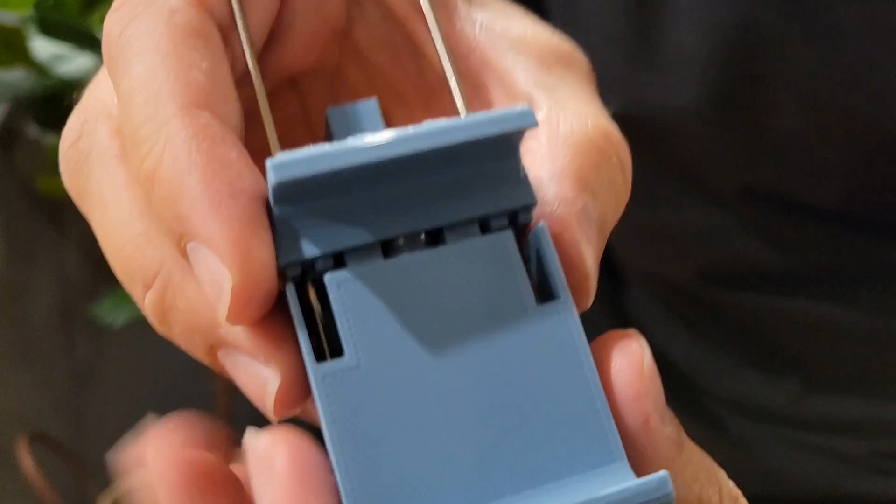All right, what you're looking at is not quite the finished version, but it's the version of a phone holder that I designed that you can stretch and move this top portion over to clamp your phone. So I'll take this old phone out and you can see I've got the spring installed in here. I'll take that off - if I move this up and down, then it will pull this back with some force to hold the phone in. And these pieces all come out because I haven't fastened it together yet, and I did that just so you guys could see.

And eventually I'll cut these bars as well. But this part - we'll get into the design of this - was designed to interface with the 3D scanner so that it can hold the phone while looking at the object in the ring, because we talked about building it with a ring design. It's pretty neat, it's a pretty neat design right here.

I like the springiness, I like how it moves. The 3D printed part has a lot of friction, so it doesn't open super easily sometimes, but with some sandpaper and maybe a bit of finishing work on the print, I'm sure I could get this to open a lot better.

I'll talk about the methodology, mechanically, that I was thinking about in Fusion. I plan to break this whole build up into 3 parts for the mechanical section. This phone holder has some more complex geometry, so I want to start slow so you guys see the whole design process.

As we break into more parts after I finish this phone holder design, I'll show you the 3D model of the scanner and how I built that. I might not take as much time there, since by then we'll be more onboard with inherent CAD design. The last part will show what it's like to print these pieces, assemble it, and how the build actually works, before we move on to the mechatronics and software side of this project.

So let's go design this thing.

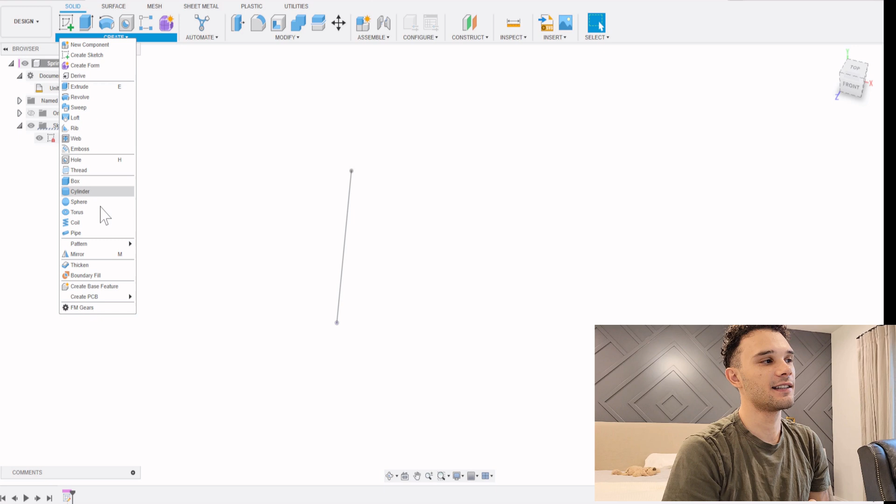So we're calling this the spring, it has an 8 millimeter OD, so we'll call it that. And it's 37 millimeters. It's not perfect, but close enough is good, because the spring needs to be under compression a little bit.

We'll create the base of the spring with the circle representing the outside, and we're going to use the coil tool, if you're familiar with that. I found there were, I think, 13 revolutions on the coil. Double check that, it's 11.

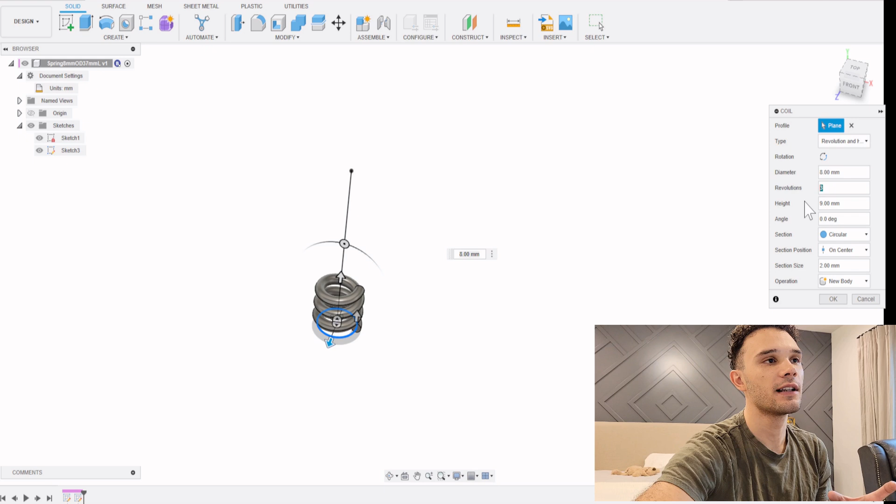We're going to play with these things. It doesn't matter if the spring is perfect, it just needs to be a good model to help us reference. You wouldn't want to 3D print this spring, you'd want to find a spring of your own. I might leave a link in the description to a spring that's similar that I can find, or if you have anything else laying around the house, design it to your own needs.

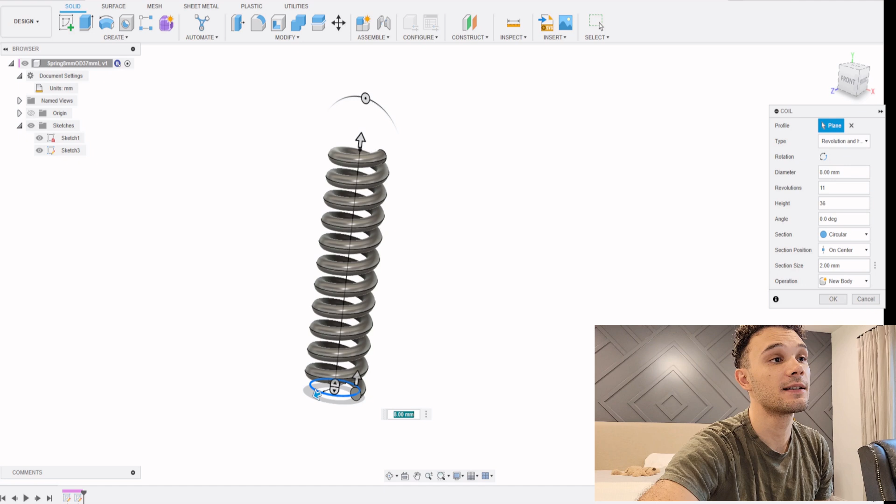The section size of the spring, the diameter of the spring wire itself, is about half a millimeter. And there you go, we got a pretty good looking spring. If you've ever used those tools, you can play that back.

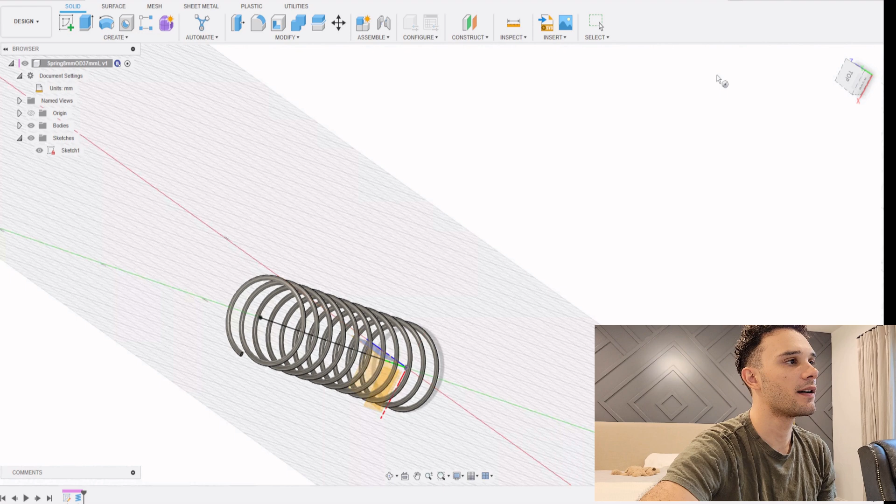Looking around the spring, there's a portion at the top and bottom that are a little bit shorter, where they kind of taper off. So most of the spring has a uniform distance between each coil, but at the top you have 1 or 2 coils that are shorter.

So we'll look at the face of the spring and create another coil. The coil tool is kind of weird, you can't just build it on a sketch, you have to build it on a plane and then move the coil you make to that plane.

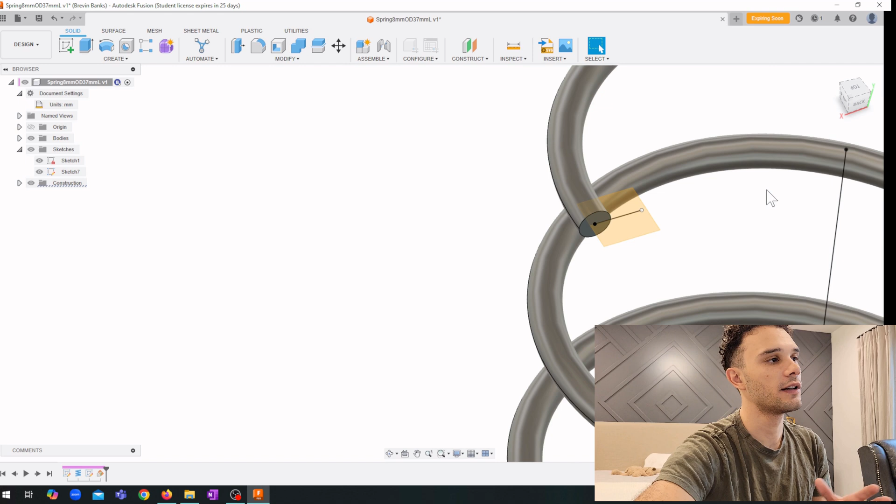So we're building a plane on the sketch where we want this coil to be. We'll use the same diameter we used, and give it about 1 revolution, maybe a little more, to create that offset tapered portion of the spring here.

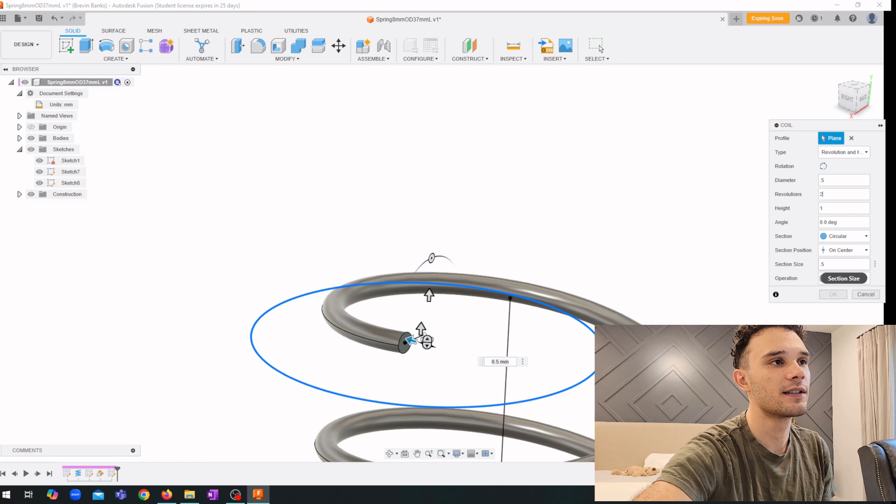I'm getting a couple errors because it says the radii are too small. It'll work when I get these parameters played with a little bit. So yeah, there's 1 revolution. Now we'll move this guy so he's in line with the previous coil there.

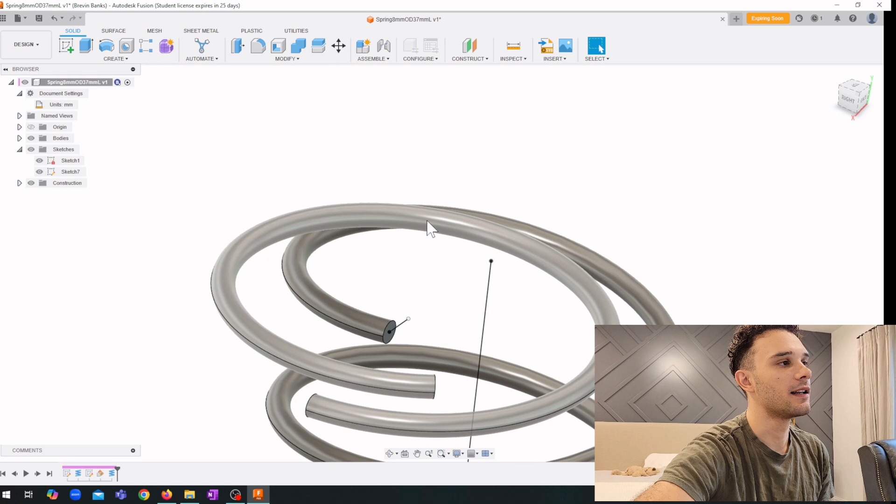We'll have to edit the feature a little bit, make it a little shorter, it's a little too tall. Then we'll move this coil onto the other coil like that, and we'll do the same on the bottom, so we can speed through that part.

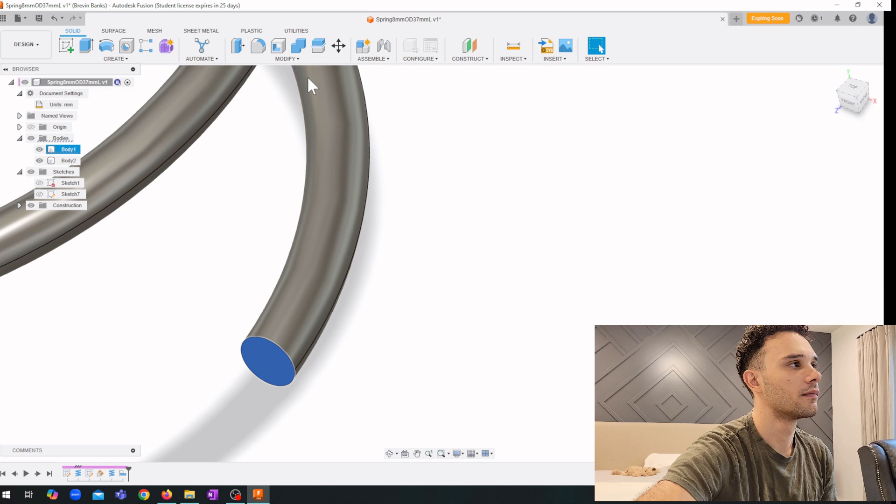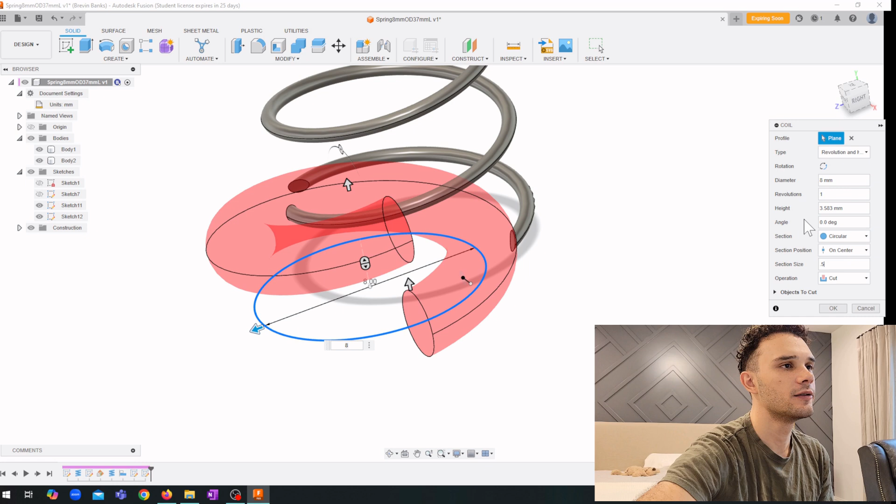Creating a sketch and the plane for the sketch, then grabbing the coil tool again to create the circle for it. It's going the opposite direction it ought to be, so we'll reverse that. Then I'll set the section size to half a millimeter and make it a little over 1 revolution.

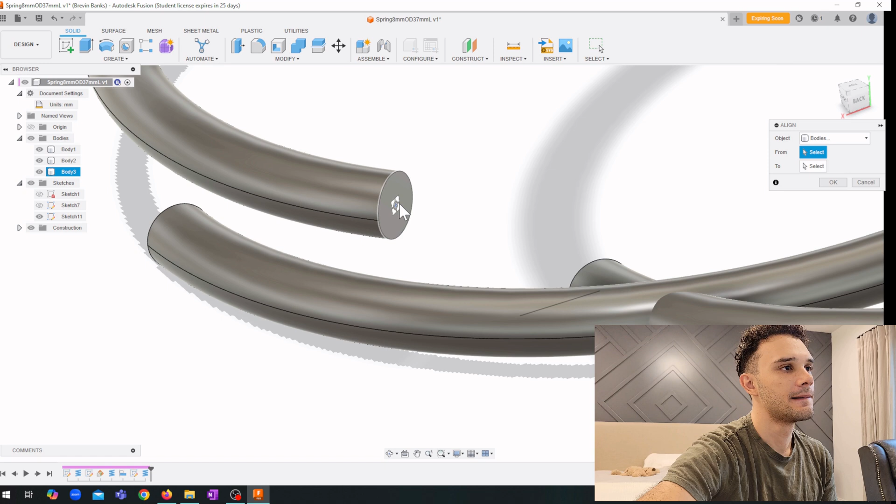This is my method for making springs. If you really want a really tight, robust spring, there are better methods than doing this - you might create your own sweep with your own path. I prefer the coil tool because it's simple.

It removes a lot of the overhead. Now we'll combine the bodies to make them one. So we selected the 3 bodies and used the combine tool, and now they're all 1 body.

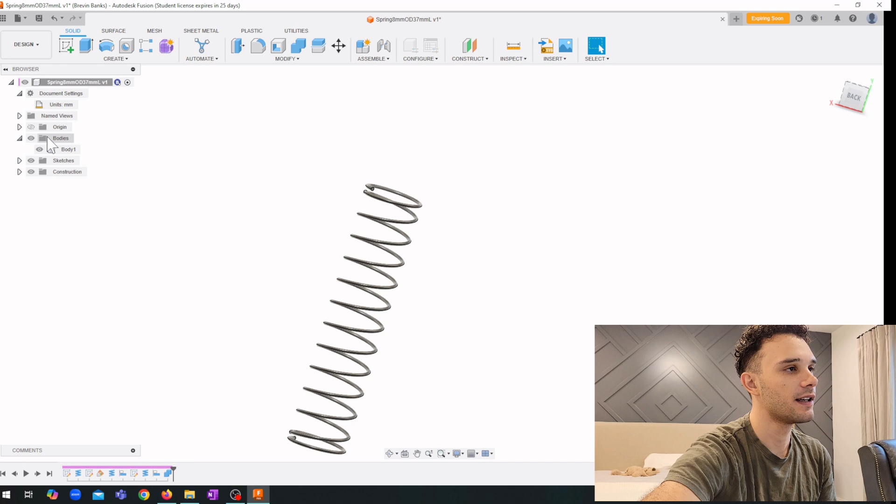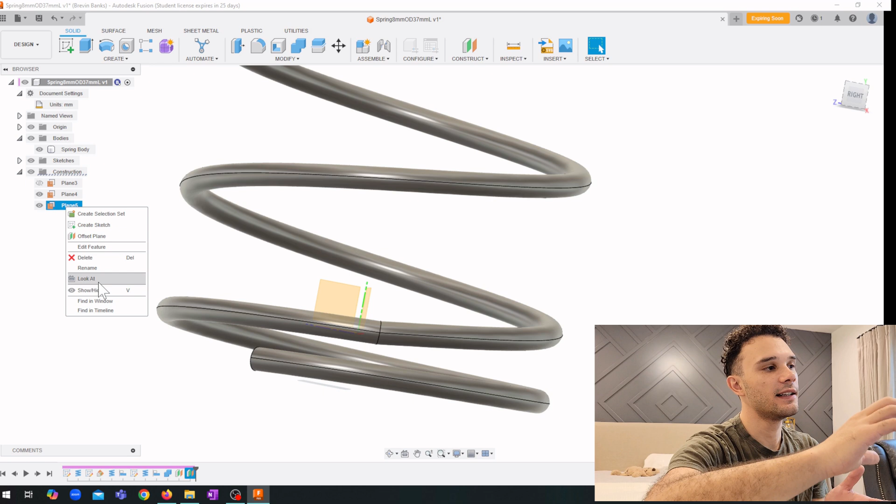I'm creating a few planes to use for adjusting when we create joints and make things fit together. So I'm creating a plane at the top of the spring and at the bottom of the spring. It's okay if it's not perfect, just somewhere near the ends. This is so we can place the spring easily and align it, because you use planes when you align and make joints. It's hard to do a normal plane to a round surface that tapers as it goes up or down, so that's why we have these planes.

So yeah, there we have the spring. I think it looks pretty good - pretty close to what it is like in my real life model.

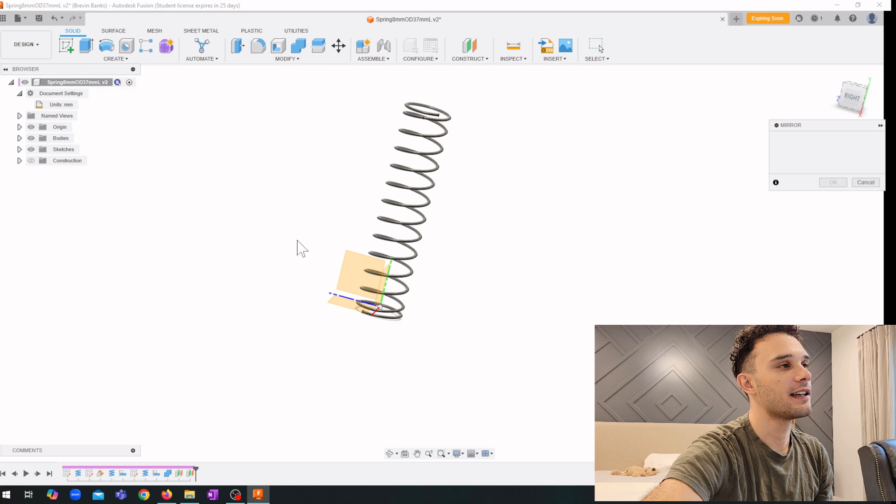And I just realized that it's backwards from mine. The one I just designed goes counterclockwise, and the one that I have turns clockwise. So we'll just mirror the part real quick, and we can hide or delete the other body. We'll use the one that turns clockwise.

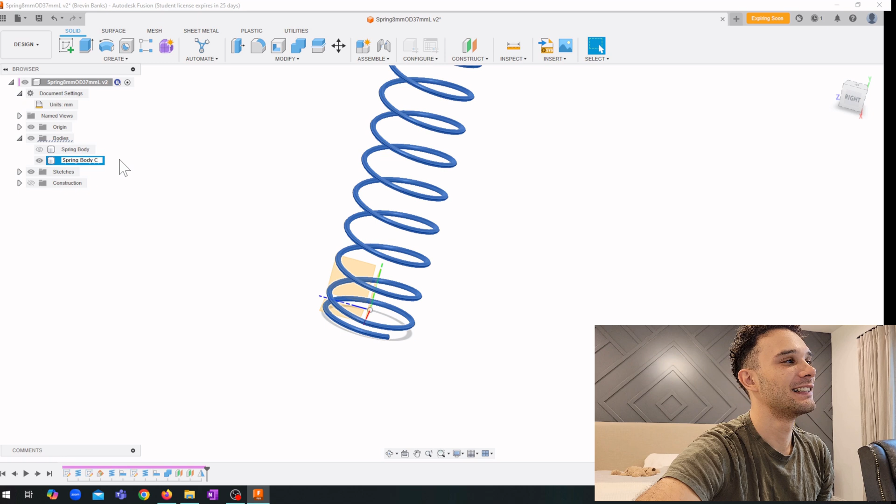There we go. There we have it - pretty nice looking spring.

Now let's jump over and create a new part for the body of the phone holder.

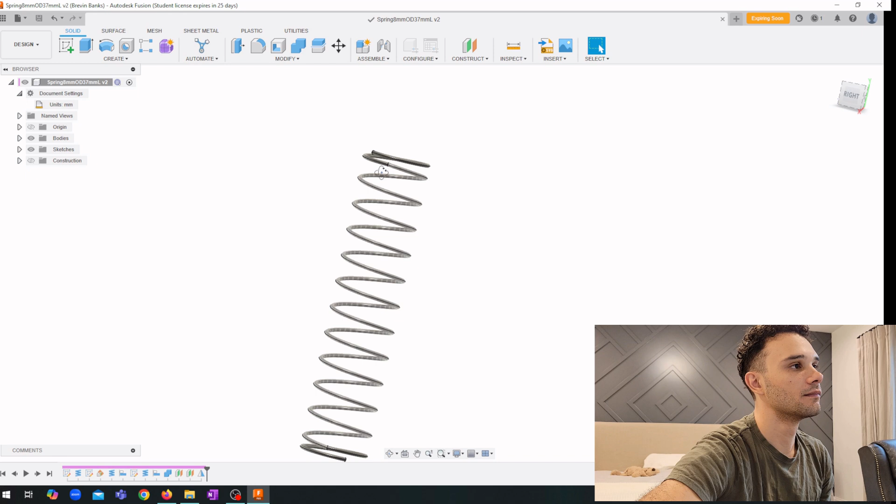Okay, so we got our new design - name it real quick, phone holder. We are going to insert what we just designed into this model. It's kind of like a master modeling mode where you take parts and build them with other parts in the same kind of assembly.

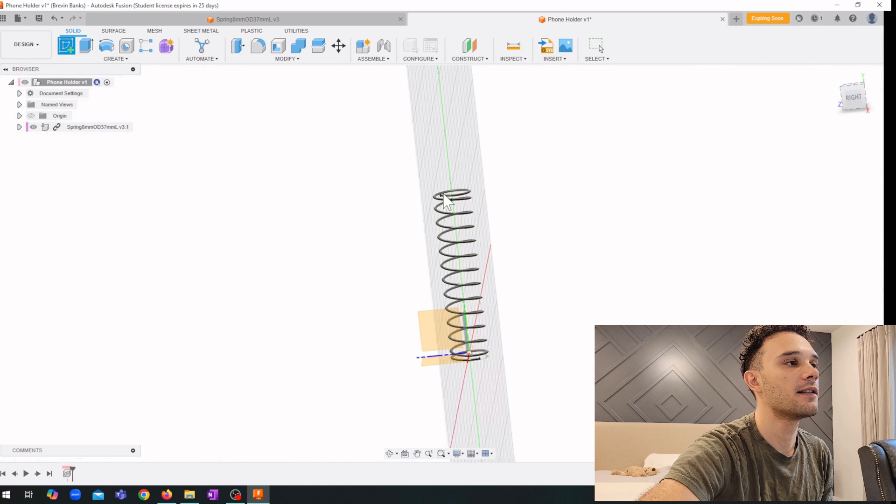So we imported the spring here, and this is where those planes will be helpful that we had on the spring, so we'll know how to reference what the true top and bottom are for where we want the spring to be contacted. We'll look at the construction planes we had for the spring.

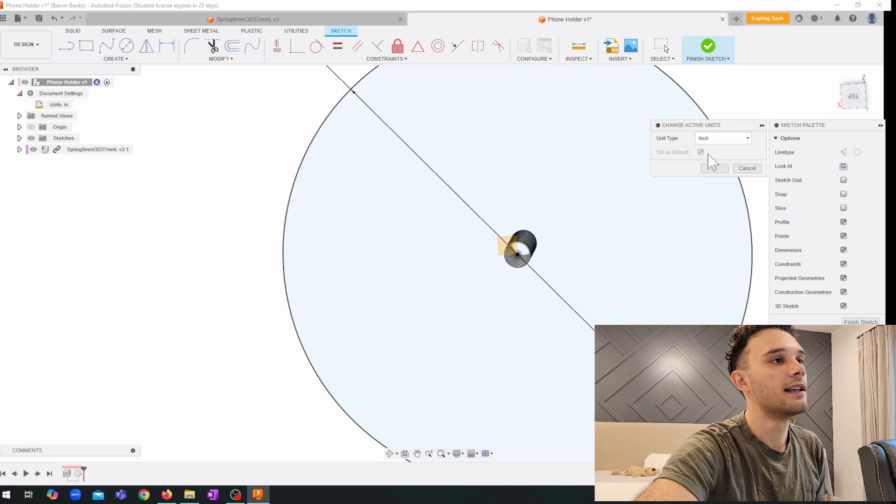We'll do the first at the top here. What we're going to be doing is creating these little inserts that go into the spring, into the inner diameter of the spring, and we'll keep the spring centered on top of it. So we're going to create a circle that kind of goes within this that has some tolerance, about maybe 1 millimeter total for the OD, and then the ID of the spring will be able to move along that.

But probably fit kind of snug with the 3D printer tolerance of this piece we're making. We'll pull this through a few millimeters - 3 millimeters sounds good. We only need like an inch or so of play, maybe 2.5 centimeters of play.

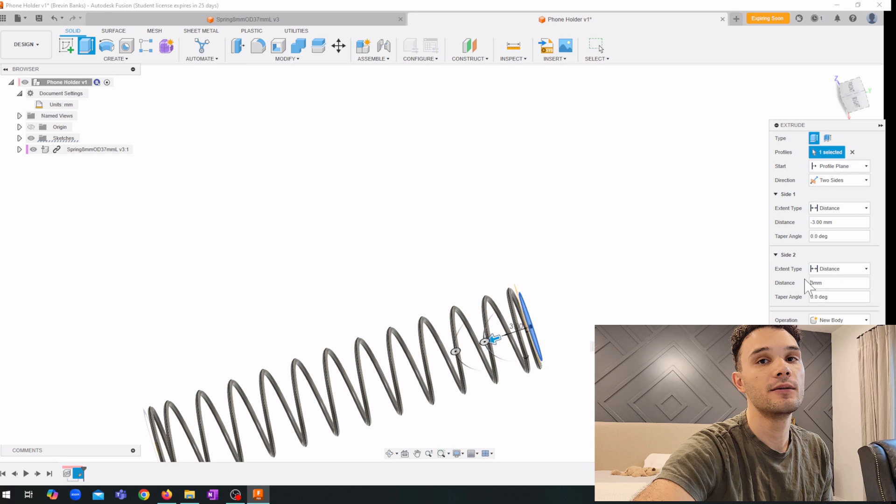And we'll pull this the other way as well, so that there's something for us to build on for the base part that this will attach to. This will make sense as we keep going.

So the spring will kind of wrap around this - you'll loop it through some of the coils so that it will rigidly hold on to that piece there. And we'll just mirror what we did above for the bottom, so we'll have those two bodies right there.

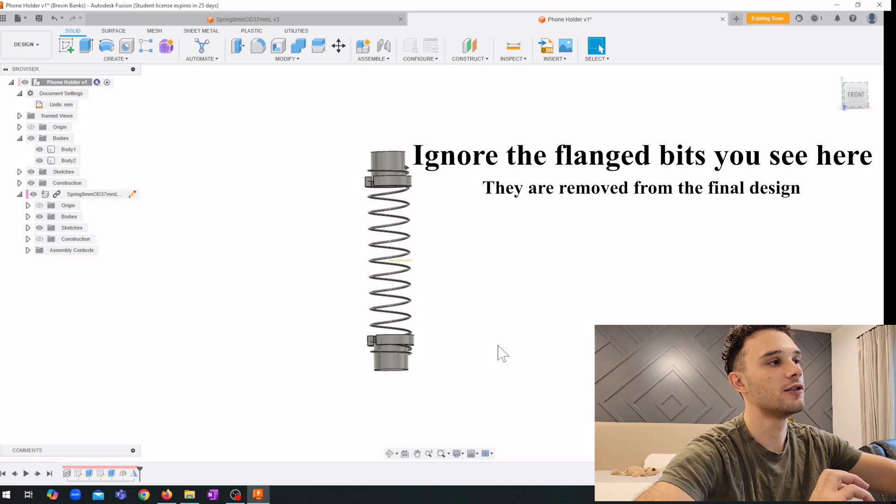Next, we're going to work on the body of the clip so we know where these things should align. I've measured the one I had currently to be about 38 millimeters wide, and I'm going to center this spring in the middle, making it symmetric about that construction line I put on the origin.

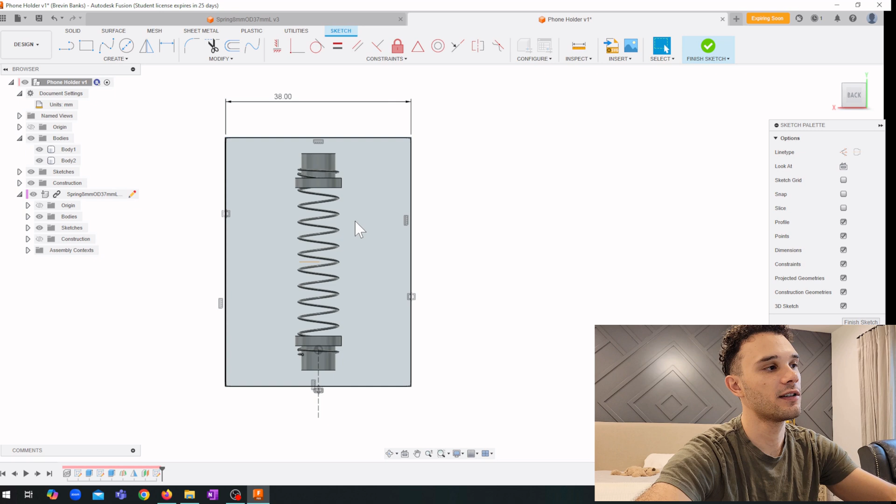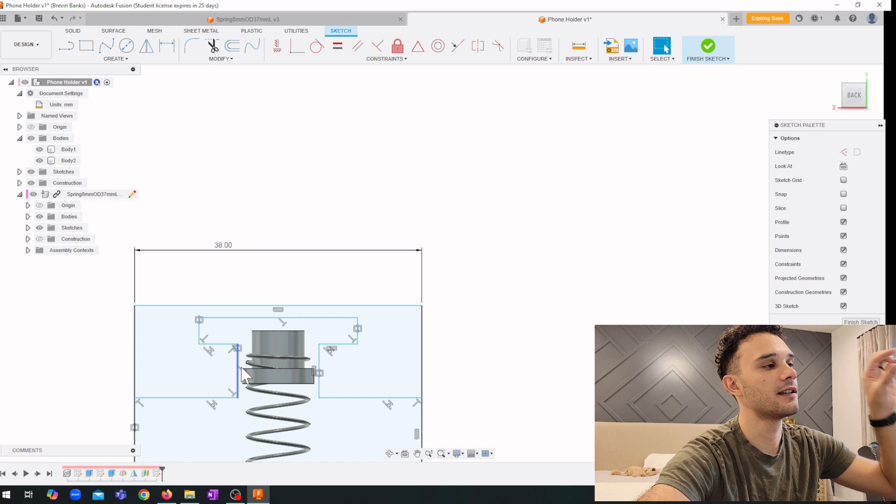Then we'll create some geometry to key these ends I've made for the spring holder attachment, so I put down some lines and use some constraints to make these things collinear. You can see that there. A lot of symmetry constraints because I just want this rectangular bit that's going to slide in and out from the front face.

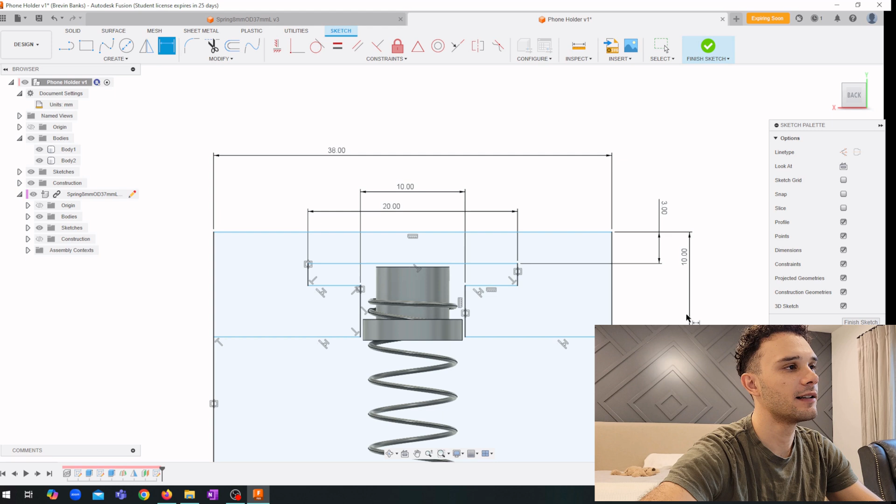I don't know, I'm really just eyeballing this. I know you can make features about 1 or 2 millimeters on the 3D printer, so we'll give that a 3 millimeter height right there, make this about 20 millimeters wide, then a centimeter wide right there, and another centimeter wide right there. Yeah, looks pretty good to me. There'll be some tolerance to play around with.

We'll just make things a little bit better here, giving a gap right there for this rectangular portion. Oh, and the height of the whole thing was, I think, also 50 millimeters.

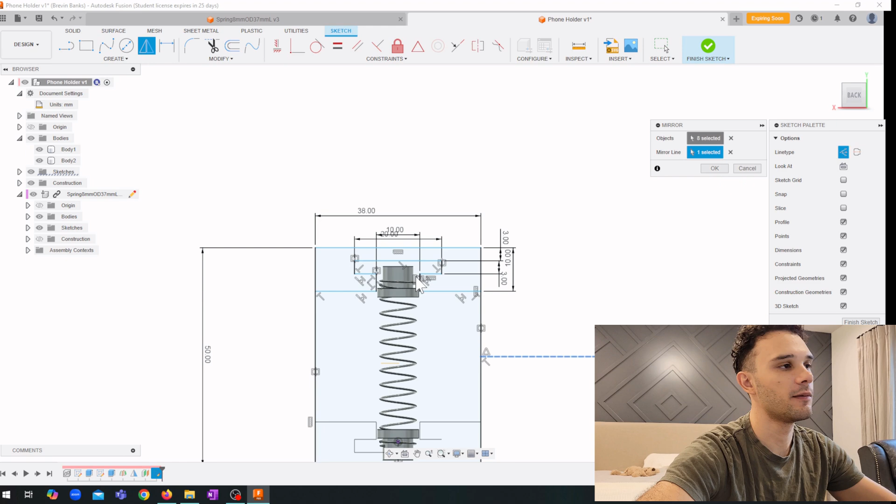We'll make this symmetric about the middle of the spring as well, and mirror that down so we can have both those features on the top and bottom. Now this will create the core feature of our phone holder right there.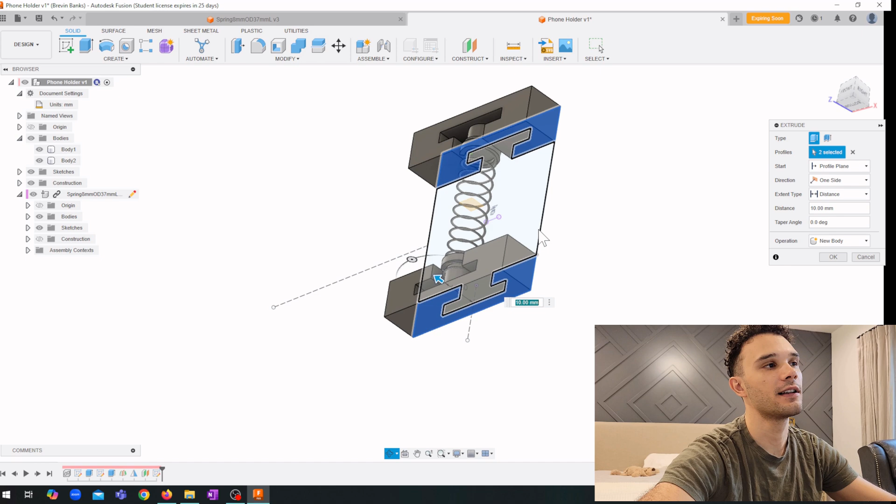So next step would be to make sure this is aligned in the middle of the spring. Then we'll pull these faces and create the first instances of the body of the clip, the phone holder. There we go. So we're looking like we've got something there now.

We'll pull the other side down and give that 2.5 millimeters, so it's up a centimeter basically, with 2.5 millimeters on the base right there.

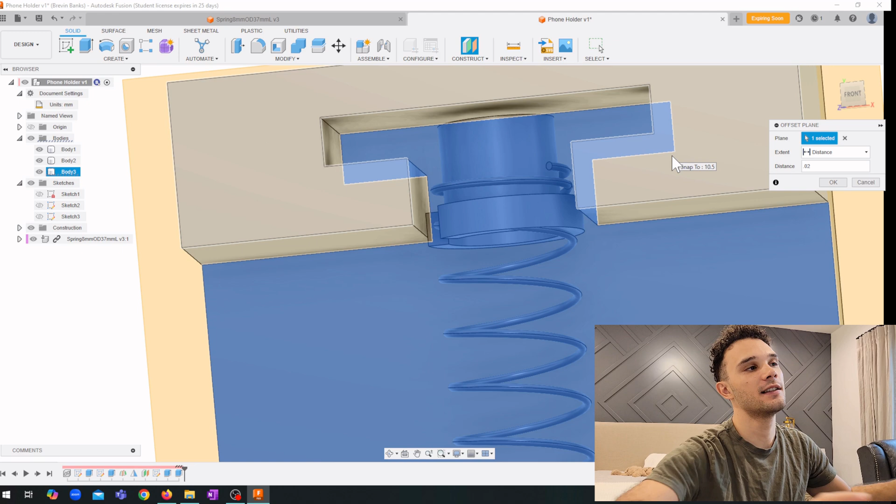Now we're going to create another sketch that's going to inlay into this clip we've made, for this rectangular portion that these circular bits will connect to. We'll offset about 0.5 millimeters, found that kind of works on the 3D printer. Then we'll pull these rectangles up and combine them with those circular portions we made that go through the spring, matching in line a little under the line of the face by maybe 0.2 millimeters of the top of the clip.

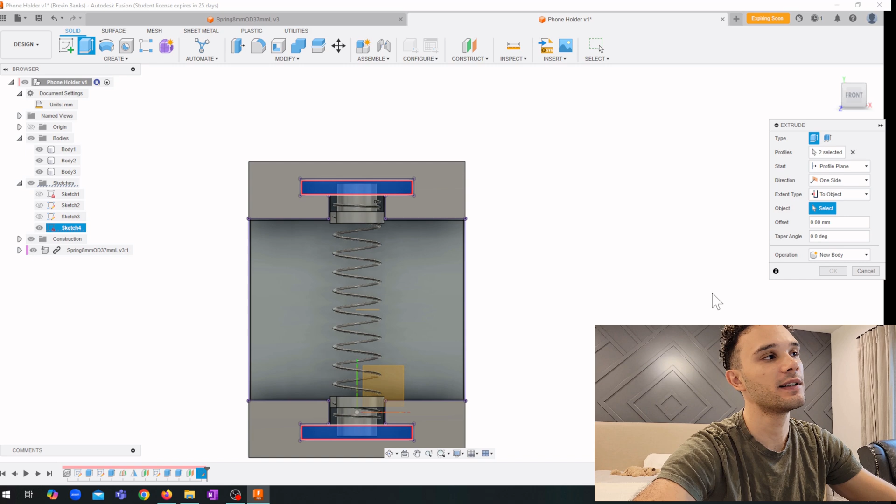So yeah, now we're going to create these rods that go into the base of this phone holder, used to manage the sliding action. These steel rods are 2 millimeters wide.

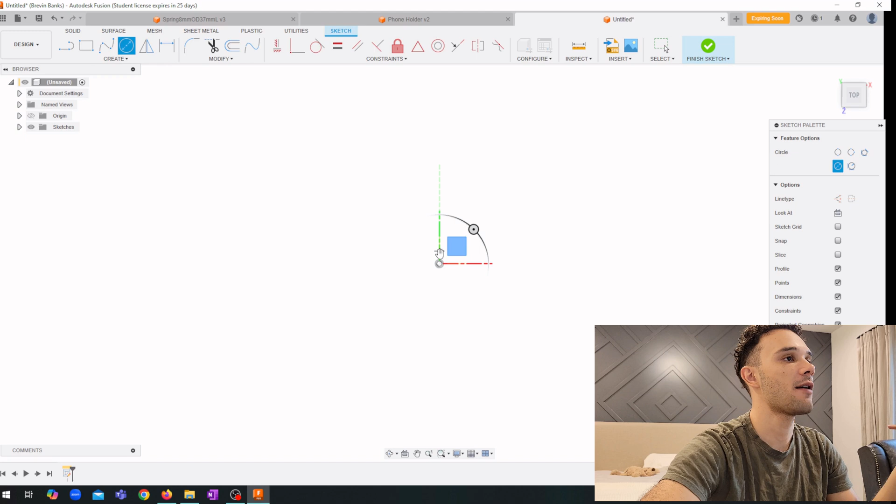You can find these anywhere on Amazon, like McMaster-Carr, very easy. You might even have some sort of equivalent laying around. You can make these whatever size you need.

I just create a circular feature and pull this to about the length of the body, or a little bit past it. The ones I have at home are 100 millimeters, so we'll probably pull to 100 millimeters. Don't forget to make your units millimeters here.

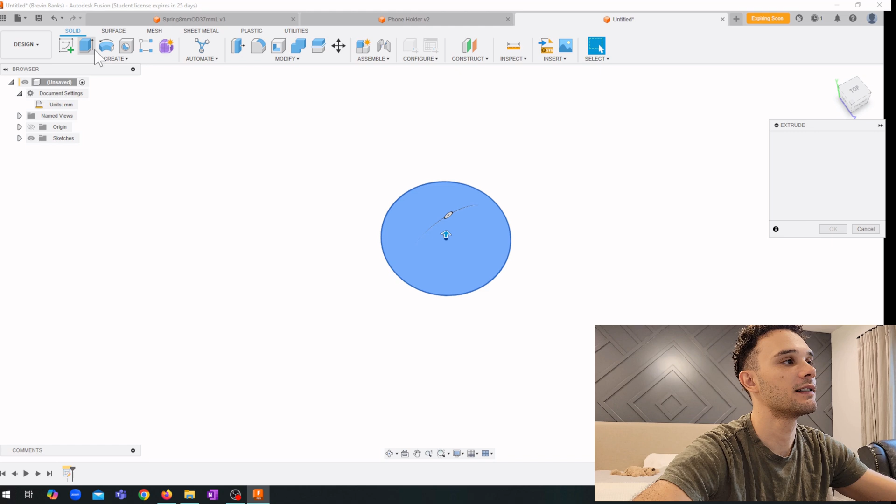Yeah, so here's a rod basically. Doesn't really matter what it looks like or material-wise. We'll call this the steel rod, 100 millimeters, 2 millimeter OD.

We'll go back to the phone holder and insert this part as well. It's important that you save your parts if you want to insert them into other ones, otherwise Fusion will give you problems. So yeah, we'll insert these rods, put 2 of them in there.

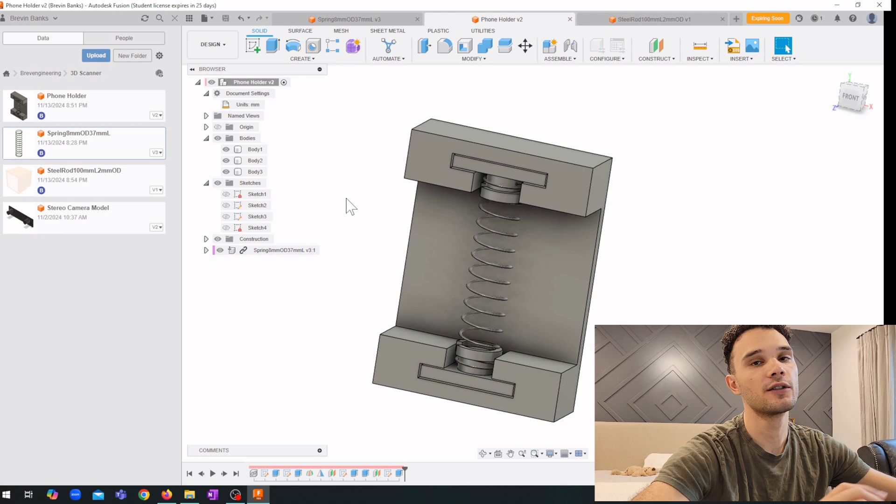And these will act as sliders that guide this phone holder so the spring stays aligned and keeps the body rigid. The 3D printed plastic's not that great when it comes to being under constant forces, so we'll put the force of the actuation along these rods.

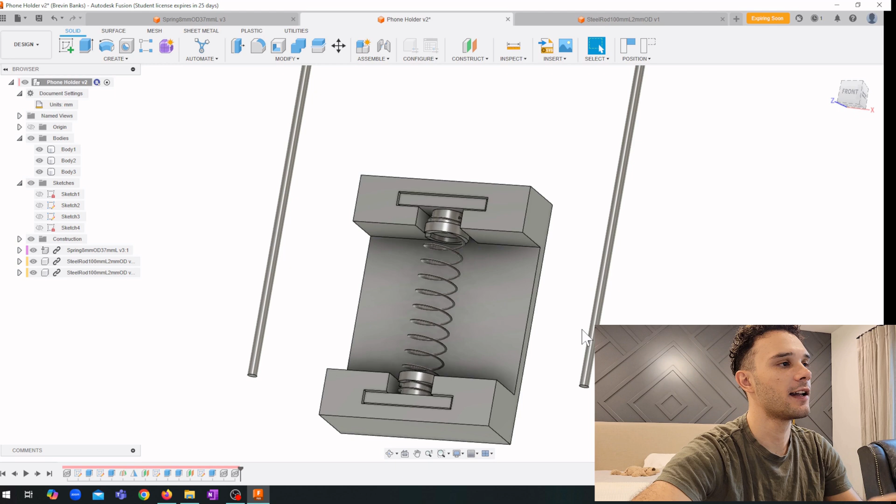So we'll align these rods with where we think would be best to keep the distance away from the phone. In this case it's inside the phone case holder part, so it's not exposed. We're going to create some divots for manufacturing here that you can place the rod into.

And then on the other side we'll put something you can slide the rod into. I'm creating this kind of L shape because I want to see if we can bend the rod a little bit so it doesn't have to poke out like on the version you saw.

I'm not sure if I can bend that steel at this small an angle, or if I have the proper tools, but I'll print this feature and add this anyway, just to play around with the idea. I'm using 0.2 millimeter tolerance between the walls, a 2 millimeter wide wall, and 2 millimeters away from each wall. They're nice clean numbers, and it looks like there'll be enough material between things to be rigid enough to not break during use.

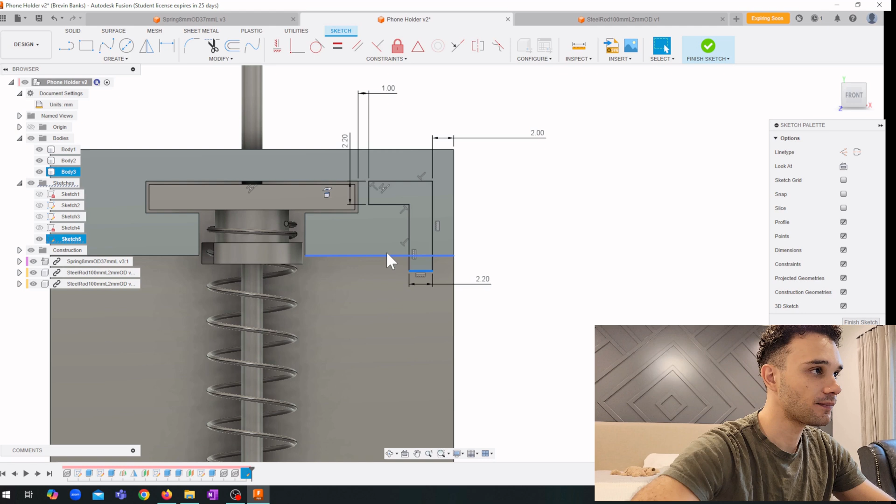So there's one. We'll cut that down to a level where the rod will still be suspended from the base, but deep enough that when I put a cover over the top, the rods will be hidden behind it. That looks pretty good to me.

We can just mirror this feature over. You can mirror features, not just bodies and components, if you grab the feature from the timeline or from the faces of the last object in the plane. You can see we cut it here on the left side as well.

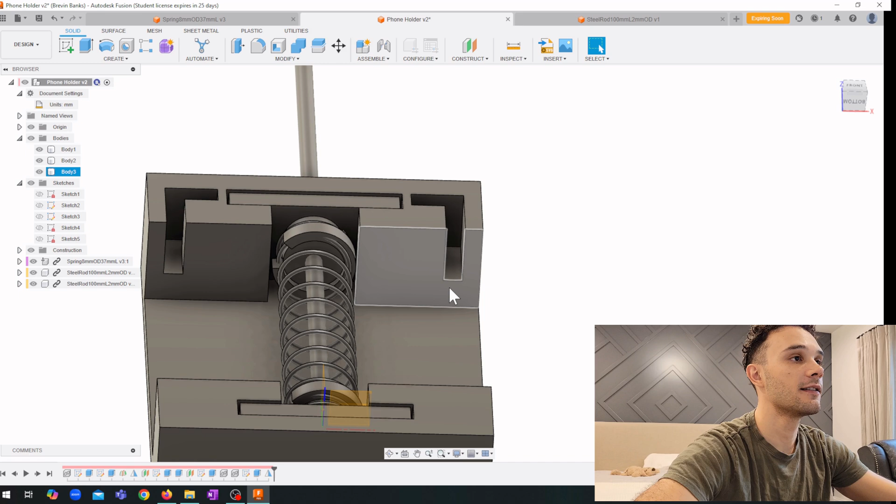Now we're going to create a sketch on that face where we just made those cuts, because it's square and it should be round like the rod. I'll hide that body so I'm not highlighting things, but we'll create some circles in these holes where we projected the geometry, making them tangent to both the walls and the bottom part, like this.

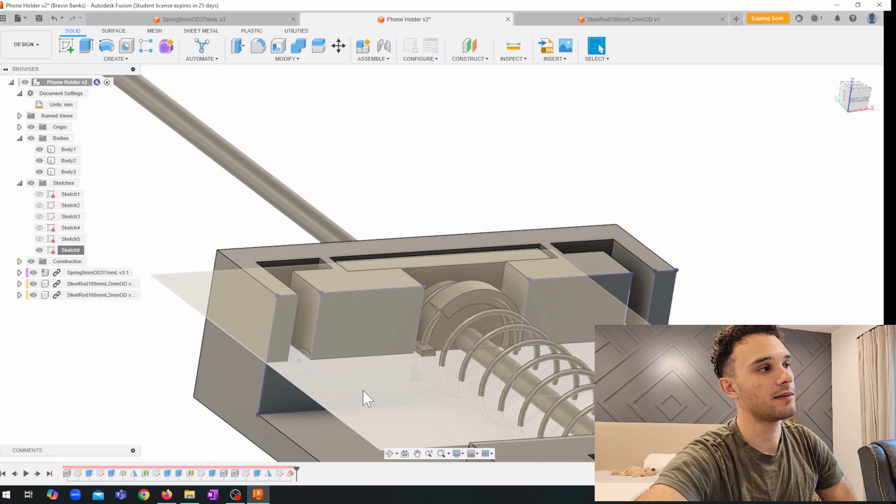We'll try a sweep so we can get the whole L shape in one go that matches the geometry. I created a plane in the middle of that circle, and then put a right angle line in the center of two right angle lines that are in the center of the width of this cut I made.

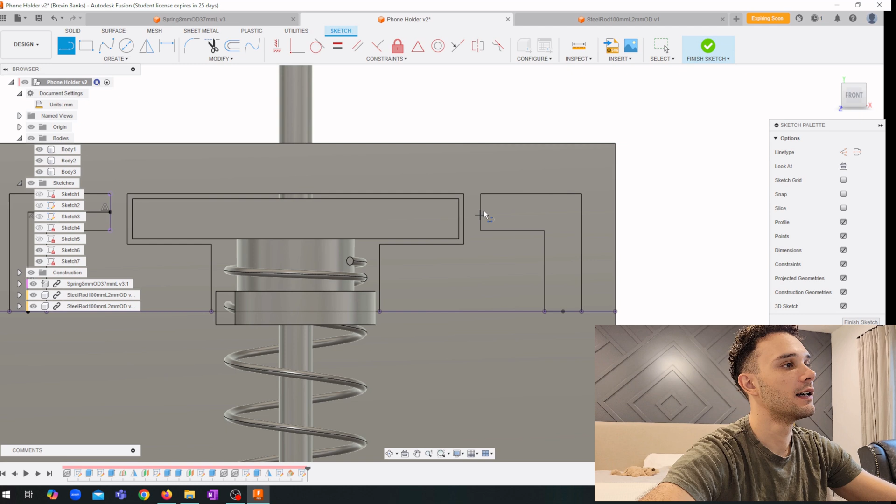I'm using the midpoint constraint there, clicking on the line and then the body or the projected lines, and then putting a right angle on there. So we have these two lines, and we'll sweep the cuts of these corners through those lines I just made on that face, giving us a round bottom in both of these things.

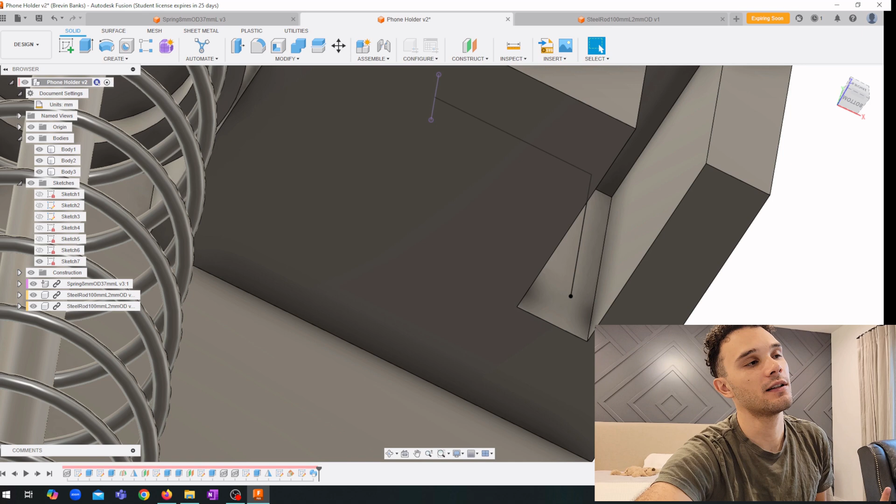We'll do that on both sides. You could also try to mirror this feature like before, but I'll use the sweep instead. More complicated features I tend not to mirror, since sometimes they can break on reconstruction down the road.

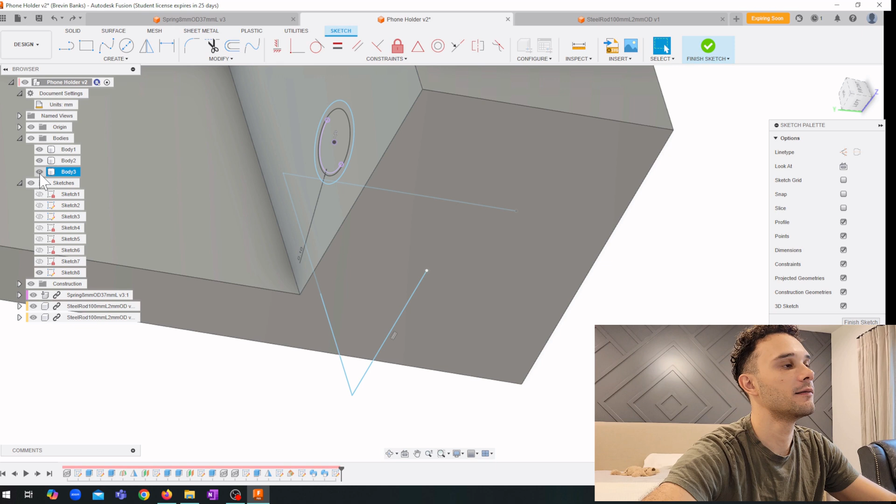We're going to create a face on the opposite side, adjacent to those faces, where we'll put circular cutouts for the steel rods to go through. I projected that round geometry from the other face onto this one, and then thought we'd put a rod and extend that rod cutout hole through the face so there's more supportive material for the rod to hold onto. That's why you see the square geometry below it.

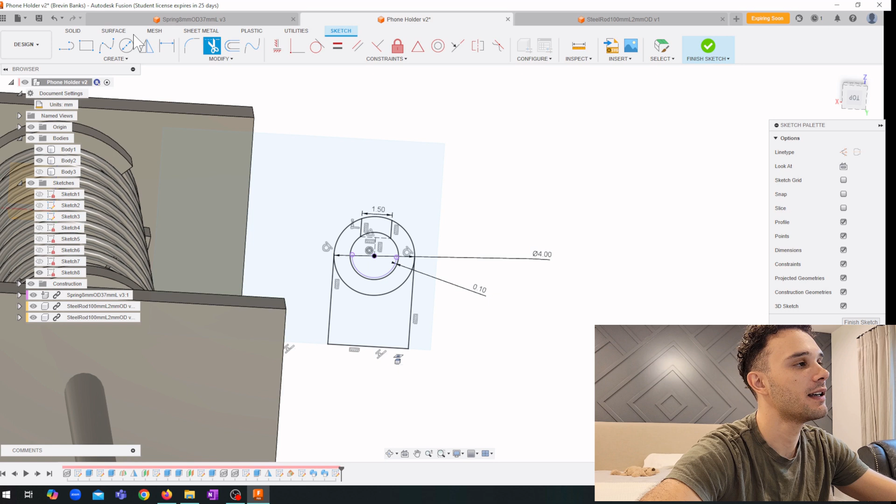Putting a tolerance of about 0.1 millimeters again, and I think I did 1.5 millimeters here. Then I gave it the larger OD, with extra material on the outside of 4 millimeters, and we'll mirror this feature over to the side. The lines at the bottom are just right angles straight down from the tangent sides of that 4 millimeter circle. Yeah, so it looks like this.

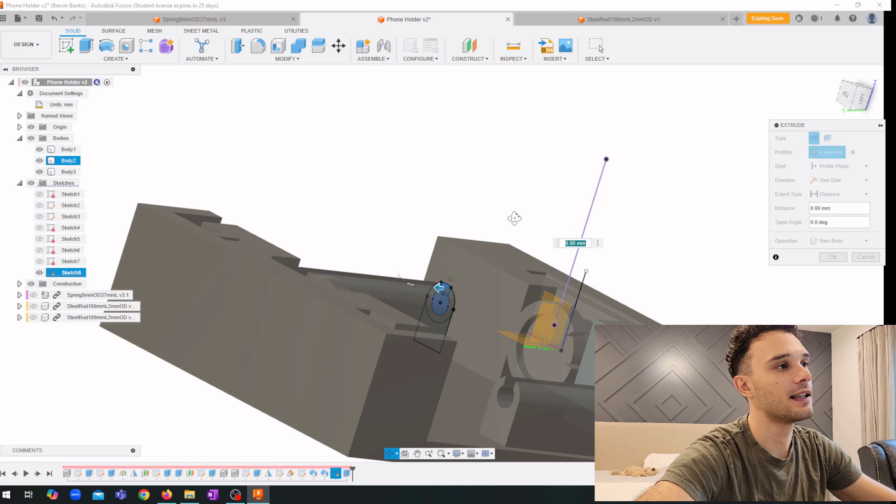I added these cutouts at the top, thinking it would be easier to get the rod through so you can see it if it gets stuck somewhere, and it'll be a little compliant so tolerance issues shouldn't be a problem. I'll line the rods with those holes I made, and you can see how they work. I aligned them concentrically, and then aligned them to the base that I cut on the inside of that face.

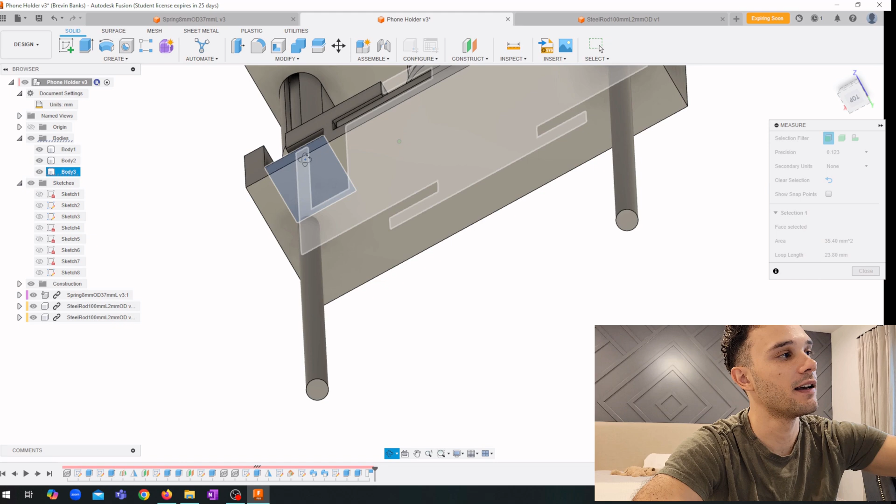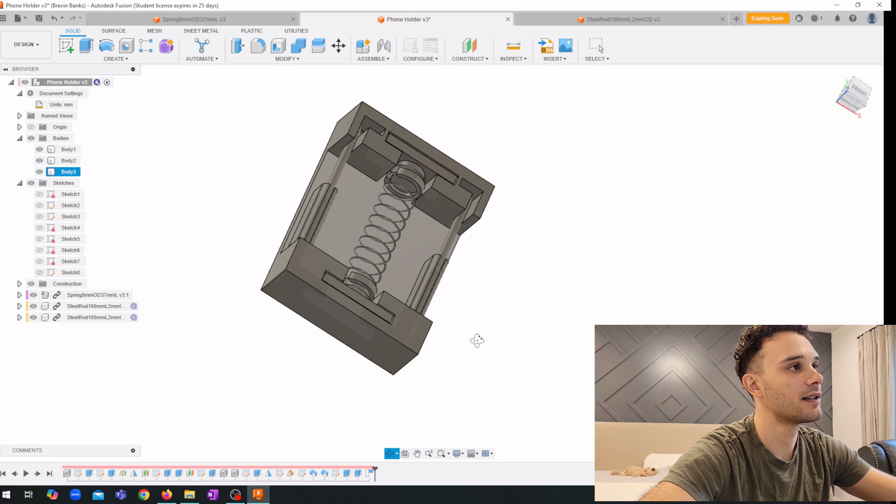Looking at the rod now, I'm going to try and add the L-shaped geometry to the tip of it so that it fits in the phone case holder, so it doesn't stick out like this. I'm going back and forth to make sure I have the measurements correctly referenced in the phone holder to add this curve geometry to it.

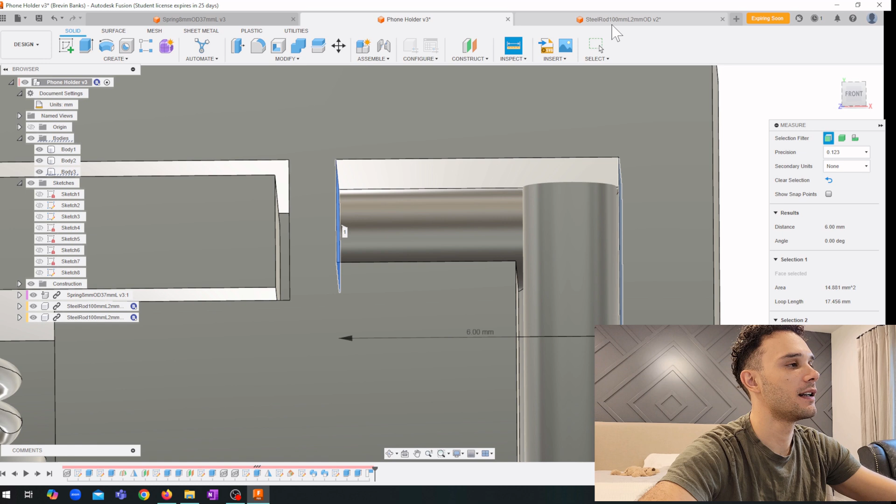So we're creating the L shape, and I need to cut it back. Yeah, so it's a right angle. We'll give it 1 millimeter. Since it's 2 millimeter diameter, we're going half of 2 millimeters. And then it goes about 2.5 millimeters to the other wall, so we'll do 2.4 here, just so there's a little bit of gap.

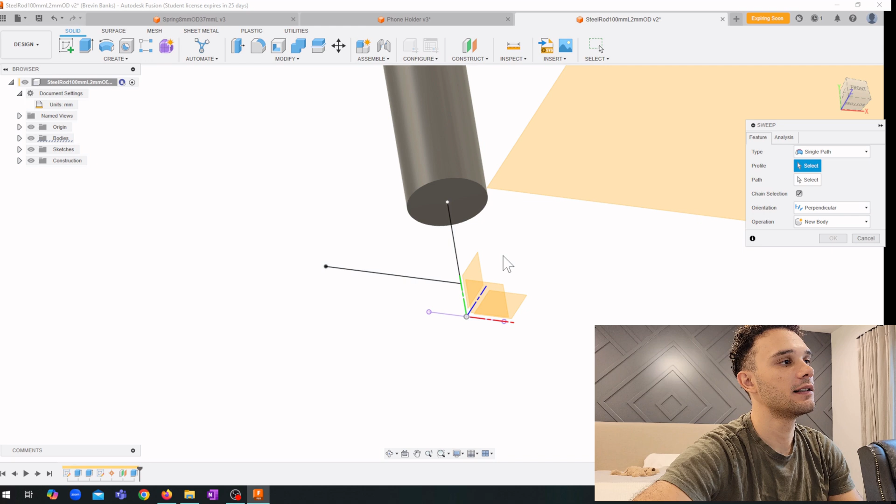And then we'll cut down the rod, make it shorter because it's too long. We'll do that by creating a plane at that point I just made. Then we will create a radii on the inside of this so that the transition of the bend is smooth, and then we'll sweep that face of the rod through that. And there you go. When we save it and update it and link it in the model, you can see it has that curved geometry now in the model. So yeah, so far so good.

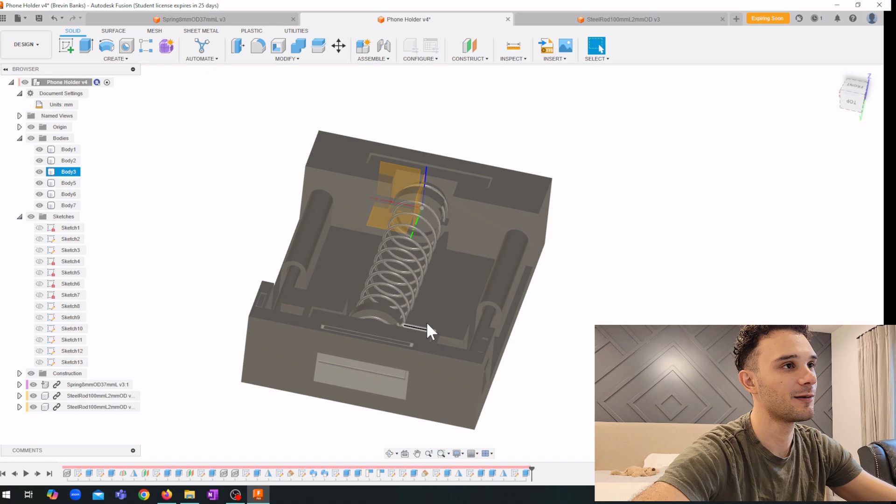You might wonder if this doesn't move, it's all one rigid object. Well, we're getting there. First, we're going to create some cases on the top though. So I'm going to look at the bottom portion of here first.

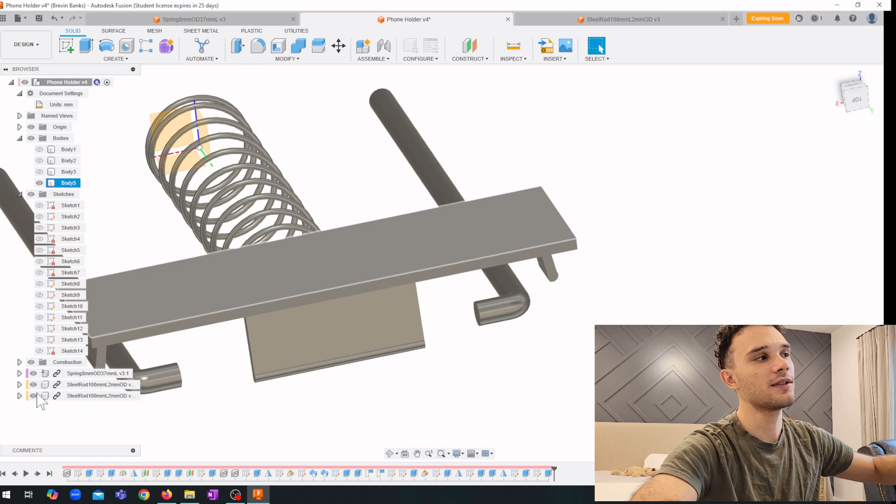First, we're going to project this rectangular face of the bottom. You can see I made these cutouts, but I decided it was not a good idea, so I removed that part of the video. They were supposed to be a way for those cases on the top and bottom to fit through some holes that go into the base, but I realized the case itself is pretty rigid and I'll just screw it on afterwards if it doesn't fit well. So ignore those cutouts. The case of the top and bottom are 2 millimeters themselves.

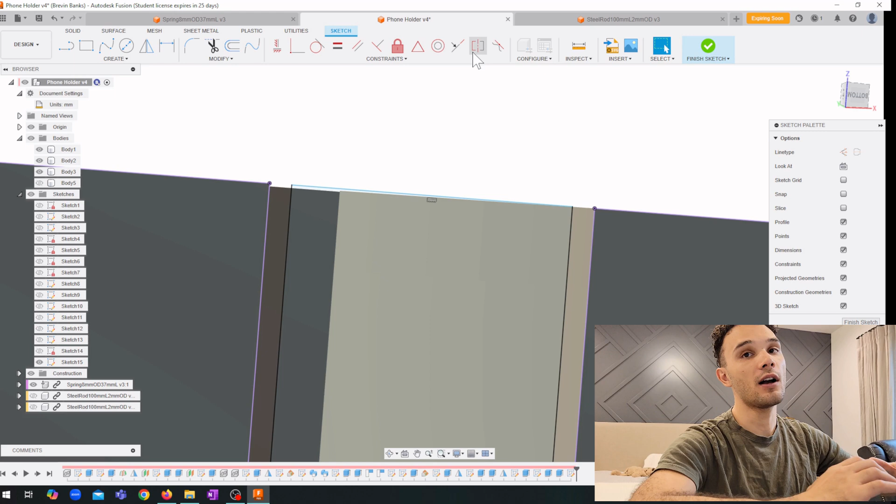And I created these divots that go over the top of where those rods fit in on that side, so that when the rod's in there, it's holding the rod against the base. So I gave that another 0.5 millimeter tolerance on both sides and brought it down to interface with the geometry of the rod, as you can see.

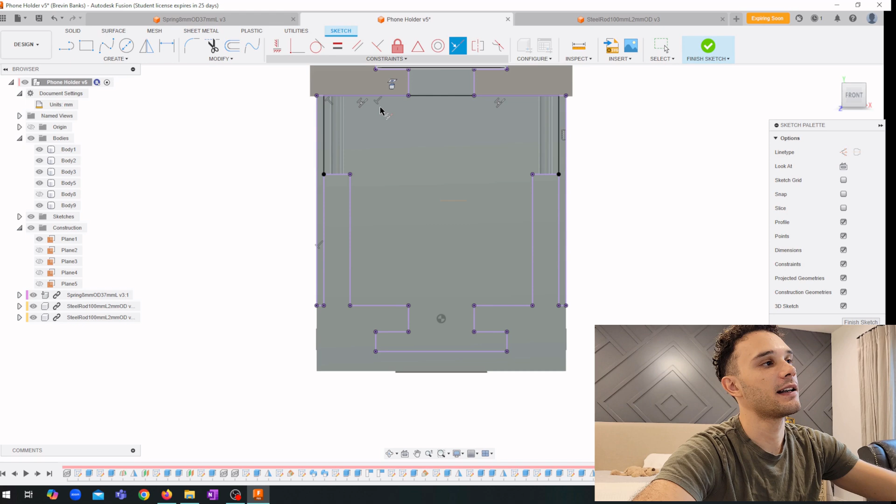Then we will make a case for the top part, so I made a case for the bottom part, now we're making a case for the top part here. I made some slots so you could see the rods from the top of it. It just matches the geometry of the case with some overlaps on the sides that go past those rods on the left and right. It's also 2 millimeters thick. Here's what it looks like for now.

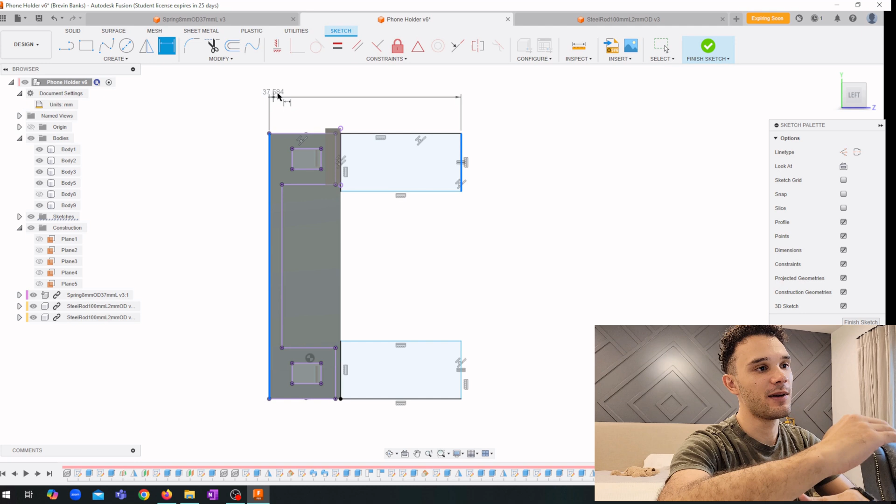We're doing the side geometry where the phone holder sits. I measured these out to be, the gap is about 44 millimeters, and these are also themselves about 1 centimeter. I'm adding a gap for the phone to fit in, so that should be centered in these portions too.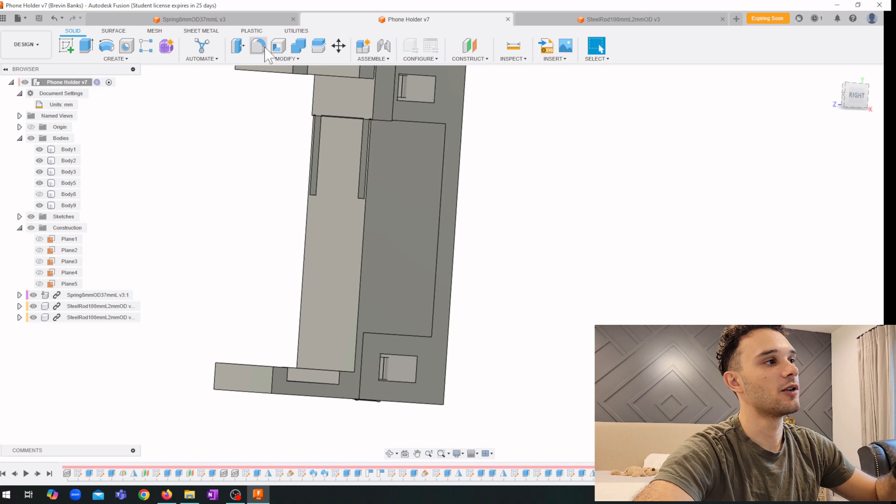Then we will cut that and slide it so that it's something that can hold the phone, but we'll soften up all these edges so they're not so rough with some fillets, making it more manufacturable and more likely to not break, and it'll be a clean and clear model. Giving them a millimeter, 1.5 millimeter edge, whatever I can give them without it being too unreasonable.

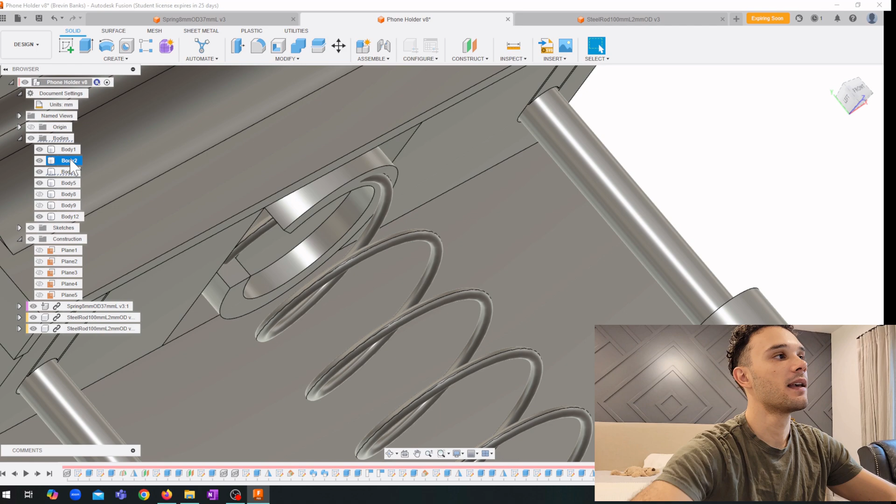And then I'm cleaning up some other areas of the model. So yeah, here we have just one kind of rigid thing with several case bodies, but the thing doesn't move yet, we'll have to cut it. Let's make it all white so that it's pretty. You can see the different bodies.

So now that we have the 3D model basically there, you're seeing that the body's still all one piece. So what we're going to do is create a sketch that separates these two pieces so that they work together.

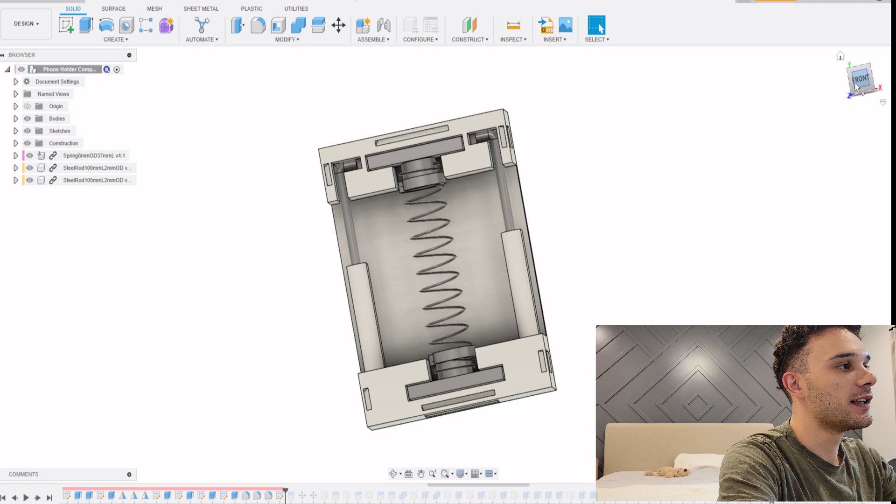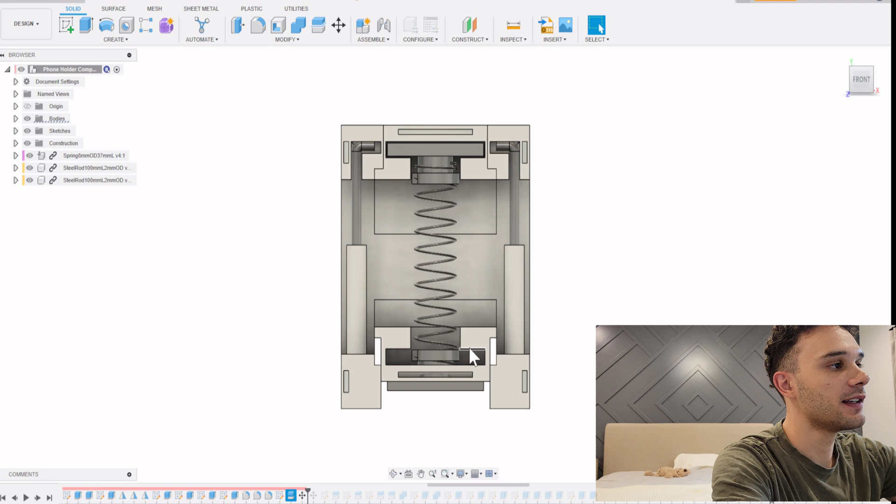My idea here is, if you look straight down, we can carve out a block piece behind the spring that attaches to the top part, and then the base with the rods threaded to these holes will make up the bottom part. So we have a sketch that defines that very loosely, and I already did this, so we can roll forward here and you can see I've cut pieces out of the top and bottom, so you have this suspended feature, and the top and bottom cases are already separate bodies, so it doesn't really matter.

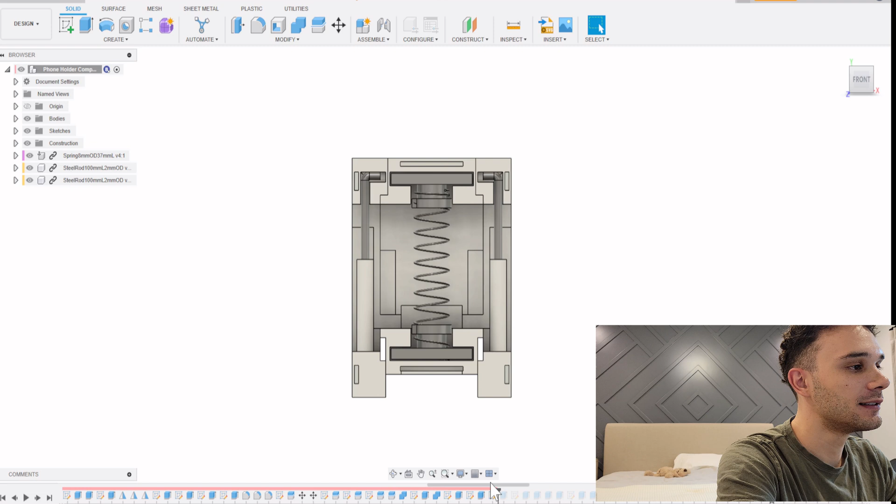And we can advance this forward, and you can see these different cuts that I made on top. It got kind of messy trying to think about the logic of it, but when you come out with the nice pieces for this design, this is what the final result looked like.

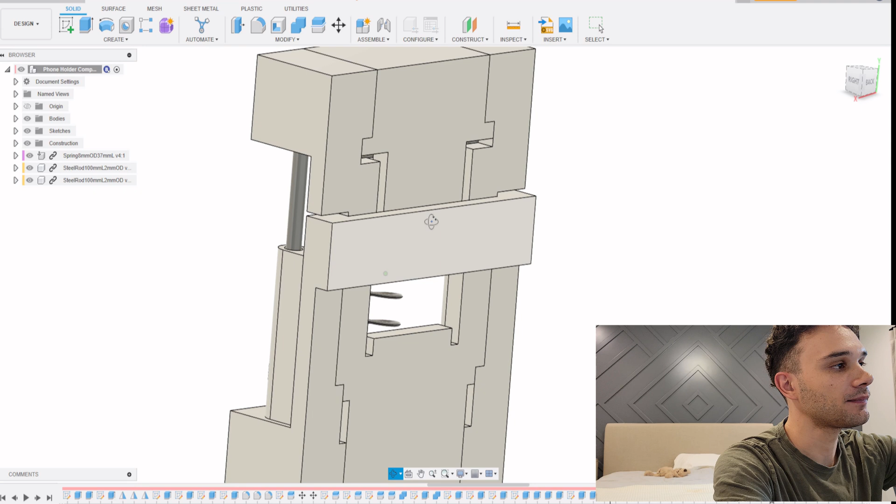So we have a separated top piece that latches back. I extended this portion out just a few millimeters to attach to this top sliding piece, and then it wraps around here with a sliding bit, and they interface with each other.

To see how that looks, we'll create joints for it, because it's not super intuitive just looking at it without the motion. So rolling forward to this, we'll hide these case pieces for the top and bottom.

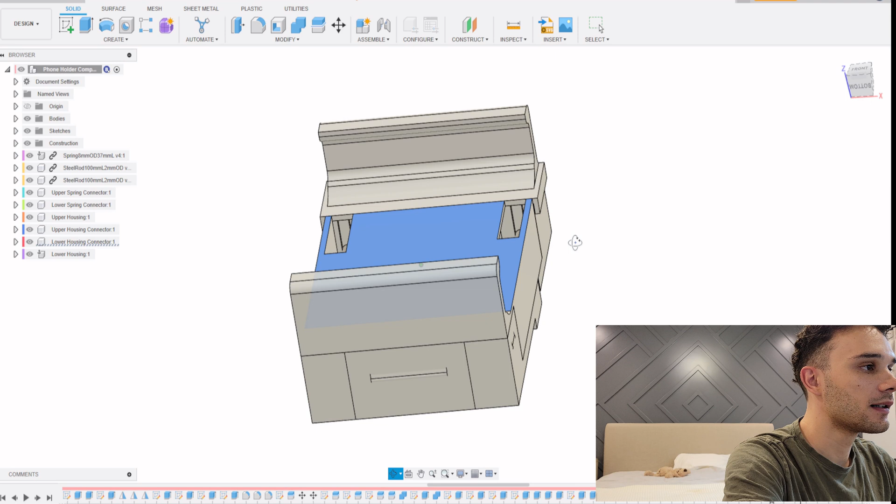We added lips on the side to go over the edge, to hug it, to give it more something to grip when I fasten it. If I use glue or nails or something, just a lip to put that through.

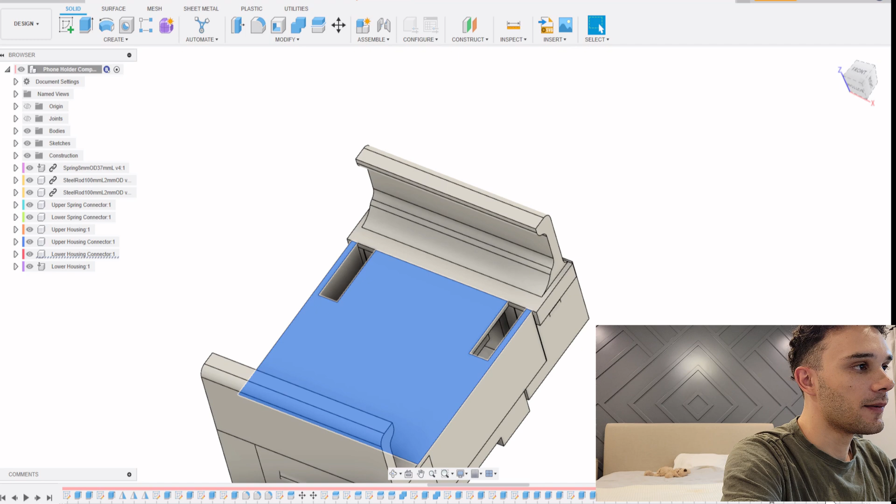And then when we add the joints, we'll hide these like I said. I added these sliding joints here so that you can see what happens when this piece moves to compress the spring. It would get pushed back down, and they don't interfere with each other, like that.

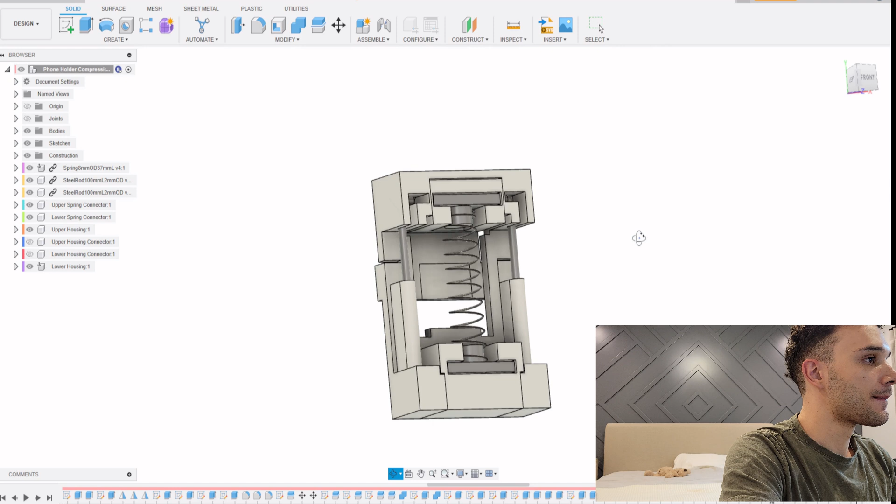With the model pretty much ready to go, we can roll back to the front here. We can see the beauty in its holy essence. And I made more of an overlap at the top and bottom for these to properly extend over the base pieces so that it can still slide, just like we had before.

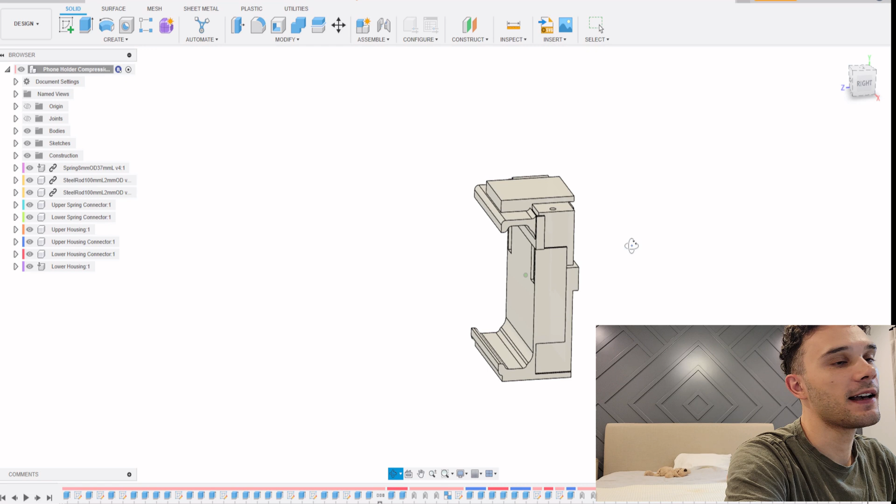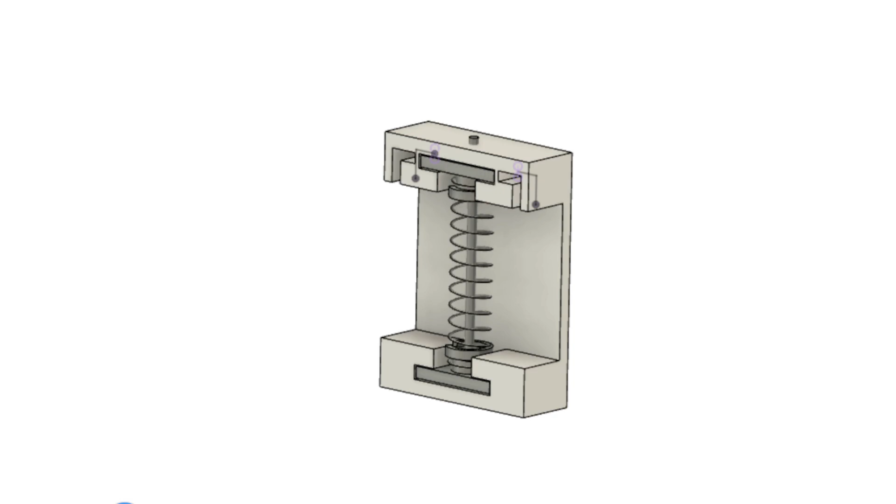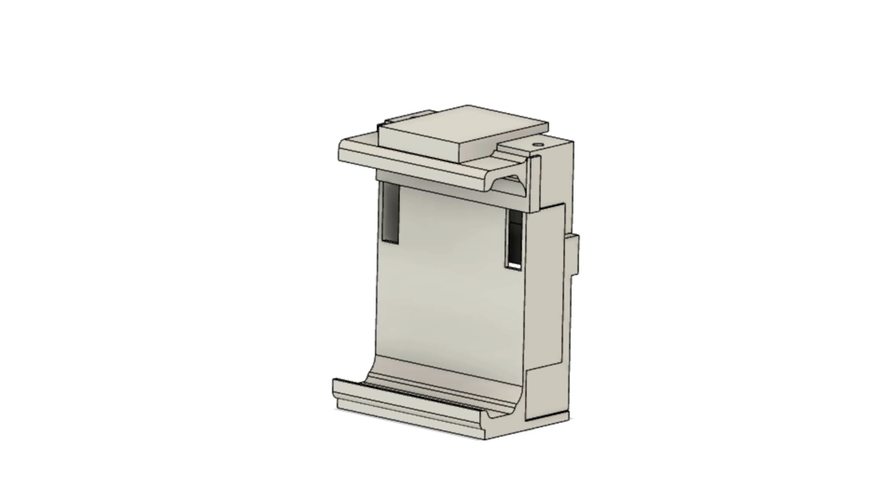So here we have the phone clip in most of its glory.